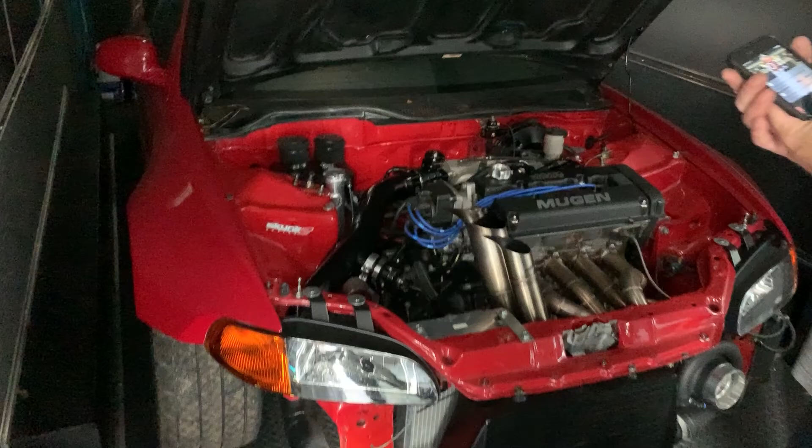Yeah, I confess, Father, I confess, 'cause I've been living wrong. The car is loaded. It wasn't fun.

Definitely probably going to have to address that. That shit's getting pretty ass wrenching. But let's go.

So after this, we're gonna head over to APP and they'll do the custom intake. We got the Skunk 2 Ultra Race manifold, the 74mm throttle body, all the custom hardware for the intake, the headers and the throttle body, and a bunch of other stuff that's gonna go on like the rest of this week. It's been a customized week, so hopefully we can just keep everything moving.

Then later on, about a month from now, we'll send it back to paint and body, because when you do all this work, paint gets chipped, ramps get run into, so stuff happens.

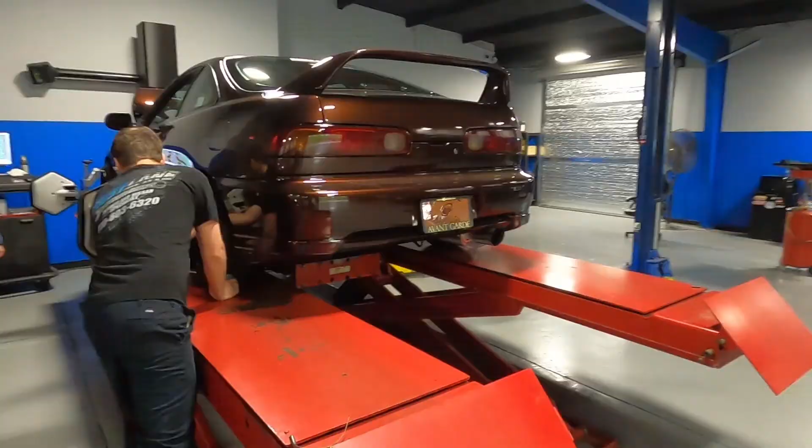That's how messed up your shit looks on the alignment machine when you got camber. What was that, the rear? Yeah, -3. Damn, I used a pair of calipers.

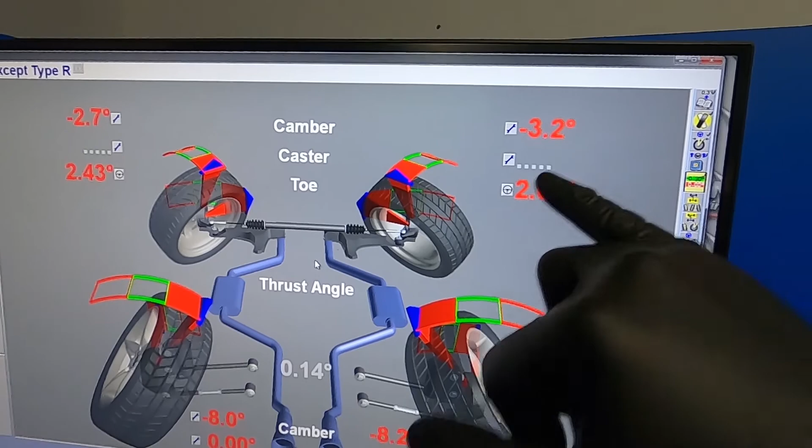I was close in the back, 0.2 off. Yeah, that's up really front, damn, I was off like 2.7, 3.2. So using a pair of handheld micrometers is what I did to set the initial camber. I was only 0.2 off in the rear.

It's off a lot though. Adjustable Skunk 2s. Yeah, Skunk 2s, okay. Yes, I think it's an H5.

So where are you thinking you want to go with camber? Get the other one to about 2.7 to match it? Actually, I'm cool with the 3 point. I'm cool with the 3.2. Yeah, I'm cool with the higher number on all of them. Okay, so we'll go 3.2.

You want 8.3 then on this side? Yeah, we can go 8.3. And then I'll touch up toe and get it perfect.

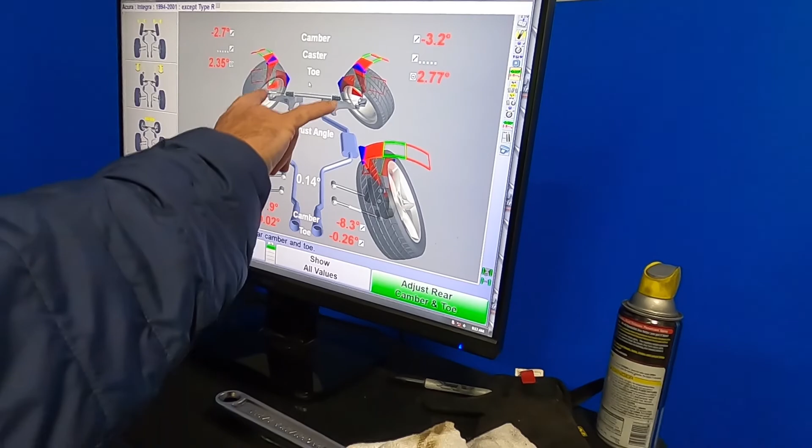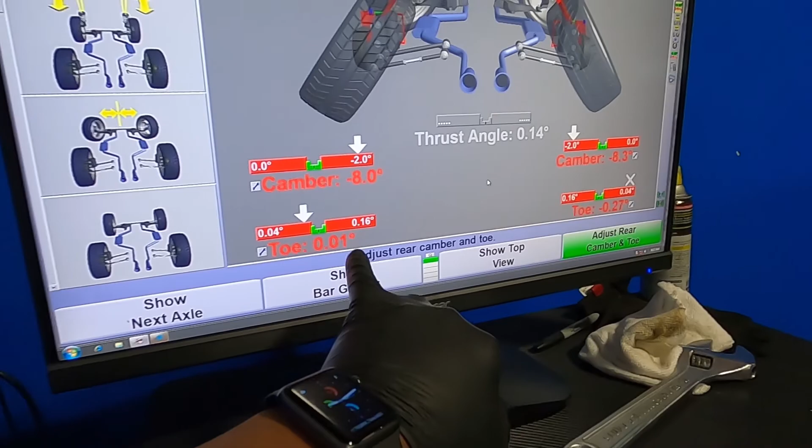Then toe is, you know, it's not bad, but we're gonna go ahead and get the toe correct. He likes everything perfect, which is what I appreciate, because then you know your car's in good hands. They don't play around here. As you see the rack, you drive right up on it, so we don't have to worry about that.

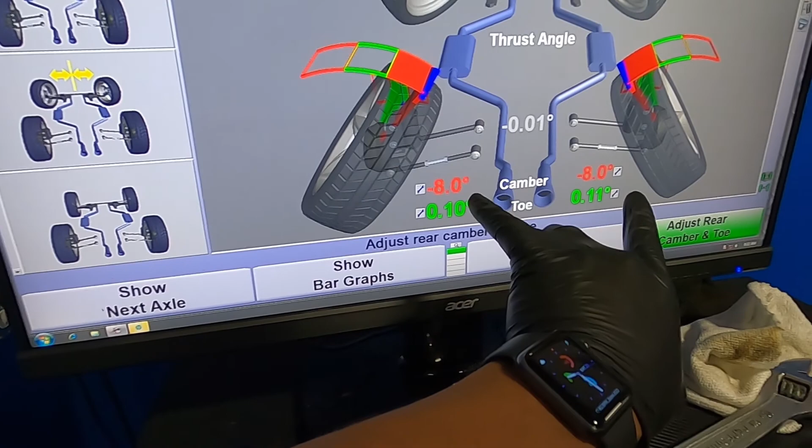Before I go messing with it, I want to see where you're at. So we're pretty good. We are damn good right here, thousandths of an inch, dead on with the 8 and 0.1 with a little flicker here, so they know what the hell they're doing.

So just like anytime you work on your car, nothing goes smooth in the way you want it. We had a pain in the ass socket head bolt that did not want to come out, but just like anytime you run into bullshit, you find out there's a better way. I'm already thinking about, I'm gonna have to come back here again so they can readjust the front.

Because more than likely I'm gonna go ahead and buy the PCIs. One, I never thought I would ever need something like that because I don't race, but it's not even because of the race application.

It's just strictly because, one, it's probably a better overall product, and it has 14mm bolts to adjust instead of these little socket bolts, which by far give you comfort when you want to gorilla some shit. You can probably rest assured that it's not going to be messed up.

So I'm probably going to reorder those. Plus they come black, so I won't have to color match them, because I was going to color match these Skunk 2s, but now I won't have to, and they come with spherical bearings, so it's well worth the money.

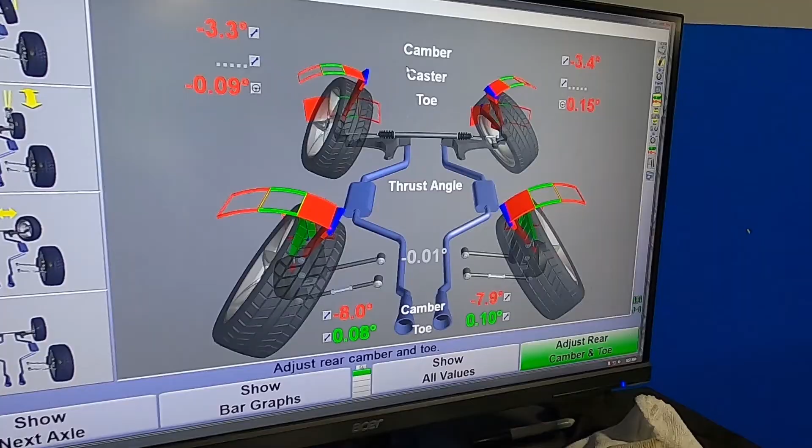So hopefully we'll get out of here, and then Harrison won't burn my engine bay up with all the nice stuff that I put in there trying to weld things together. So we'll go from there.

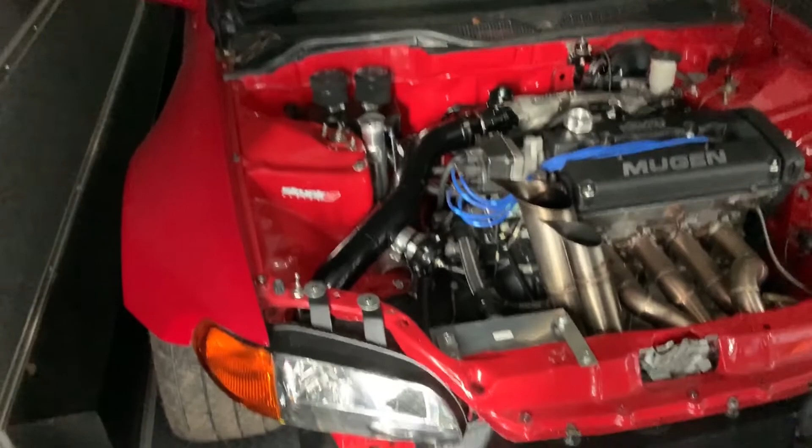It's serious. She's dusty, sitting in here. Oh my goodness. Paint on it's flawless, so, man, it's just dusty.

So finished up here at Fast Lane. I gotta say, I just found an upgrade that I'm gonna do to this Integra. I've already done a lot of upgrades, but I'm about to do another stage of upgrades on the front suspension again. After we already just did this stuff, I'm about to upgrade shit I've already bought again, and it's probably gonna happen within the next couple of months, and you're definitely gonna want to see it.

It's going to be a game changer, especially for me with air suspension going up and down and not wanting my alignment or toe or camber to change much when I'm in the positions I want. So we're going to be changing about 3 or 4 components on this car again, stuff that's already been bought brand new, bring it back here to Fast Lane, and it's going to be a totally different video this time seeing how much adjustment and stability I will have after doing this upgrade.

Not to mention, had I known I was going to end up in this situation not having the trailer, I would have ordered the damn race ramps ahead of time. John put me on this shit.

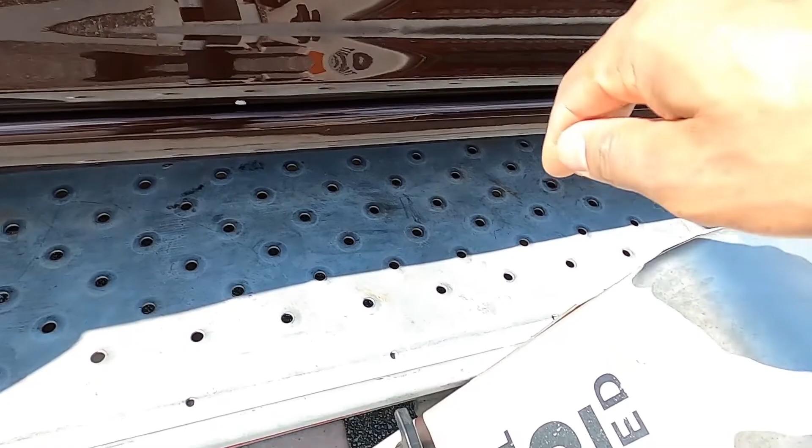All right, so listen, I'm not happy about this shit. I'm pissed because it's happened twice this morning, and this time was worse than the first time. I chipped the shit out of my paint on this damn thing. This door has been getting abused throughout this whole process.

I hit my painter up. He's like, don't worry about it, we can fix it. But it just burns my keister knowing that if somebody sees the car and says, oh shit, it's hot, now you got this paint chip, and they're like, oh, what happened there? It fucking blows.

All right, so I'm here, got the car unloaded. APP, definitely responsible for putting the motor in, doing all the nice little custom stuff. Part of the fam along with MPC too, so Wolfpack, MPC, APP, United, and Fast Lane when it comes to my alignment. I mess with very few people, period, when it comes to this car.

But right now, Harrison is fucking late. Going out here doing this. Brittany's fixing pictures after Eric basically ransacked her camera, probably tore all the settings up. Harry's on this.

Oh, hey man, what the hell is this? What happened to the damn RSX? I sold it. This man sold his RSX and pulls up in this. That's a lifestyle change. I don't know what's going on right there. What the hell made you get that? I like it. Midlife crisis. Midlife crisis. Wow.

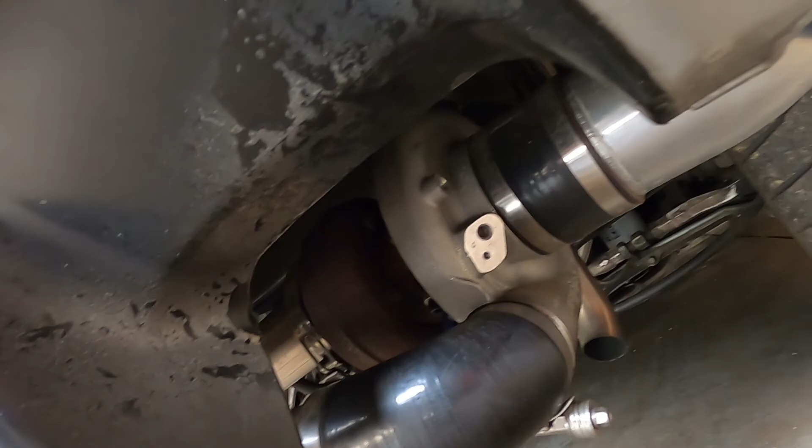Getting your ass whipped before you know it, because you think it's just a regular NSX, and then before you know it, you can't even snatch enough gears before it takes off on your ass.

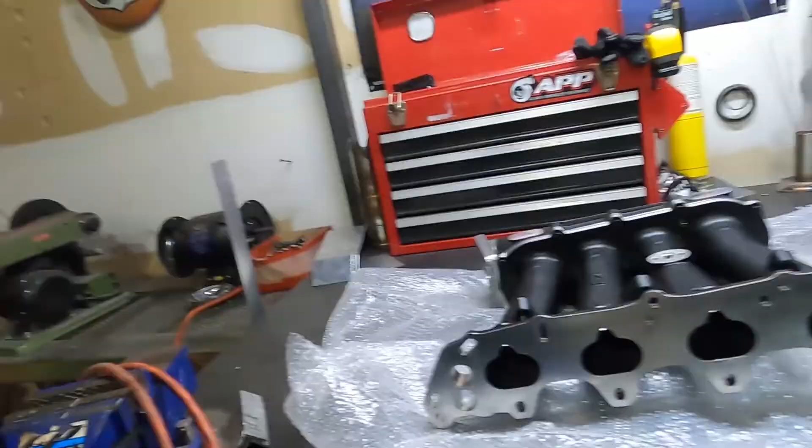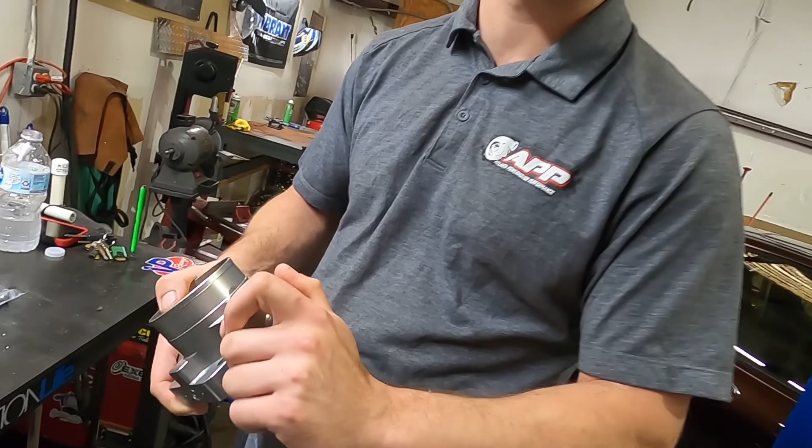So they have a problem sometimes with the throttle sticking open. You basically go right up where that return spring is on the backside, and you just move this hole over so it's tighter. Snaps it shut. That's why he's the fucking professional. Gotcha, because the rest of you guys are just installing this shit and riding out.

Climb some hills, actually use something. This man is going crazy with this little truck. I remember when he first got it, the turbo he wanted to put in here was like half the size of the engine bay. And now he's really doing shit with it.

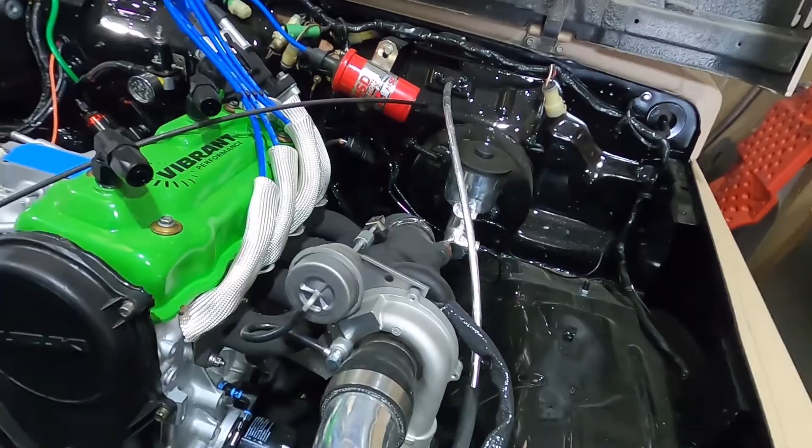Look at this, oh, they go on the inside. All right, cool, oh my gosh. It's just all type of little golden nuggets up here. I'm telling you, at some point in time, you got to come out of your garage with this rickety Honda Acura shit. It's got to stop.

It's just being real, we have to do better. Look, we got flat screen TVs, we got Hot Wheels, you see I got a chair. God, look at this, this is the best view you can have right here. I'm sitting here watching a master mechanic.

It's the best time up here. So as soon as he gets to a point where we can do some more video, where the intake's coming off and the new intake's going on, I'll get that on there.

This is real life shit right here, this is real team player stuff right here. This is the team, you see that? She's got the Kindle Fire, assembling that, trying to make sure things are good, he's over here Loctiting. This is real, I'm telling you, this is family shit. You don't get much better than this.

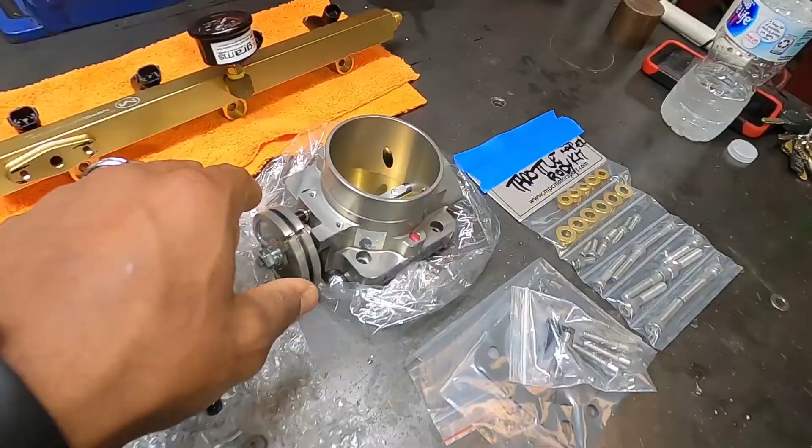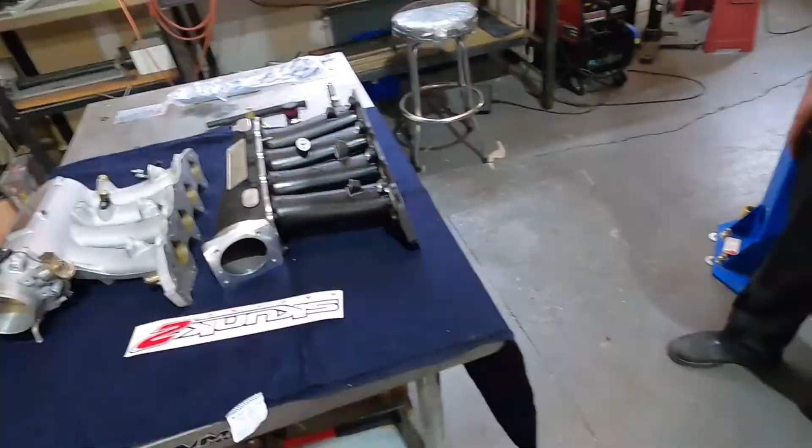Big manifold is off, old and new. Harry's gonna finish this shit up. I'm about to dip, there's a lot of other shit I could do. The car's in good hands.

Yeah, and I gotta work out. This shit around here's got me wanting to work out. I had a donut, so yes, I dipped out early.

Last thing you all saw is he got the old intake manifold off. I just got way too much stuff to do. Plus the car is always in good hands with Harrison and Eric, those are my bros, they fam. I'm not concerned about it.

Plus we're already gonna do a tune video anyway, so they'll get pictures and I'll put the pictures up on the Instagram page of the intake manifold install. They also will continue to do the intake custom mockup, fab work, and install starting Monday, so there'll be more pictures of that up on the Instagram page.